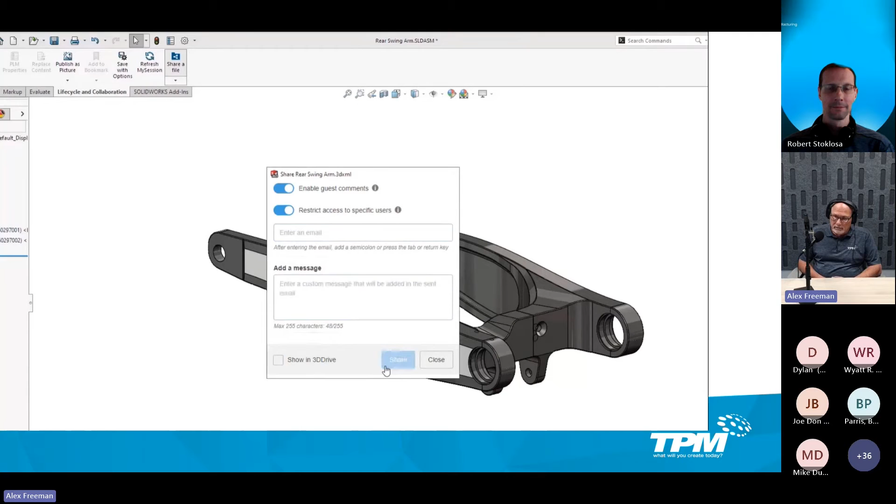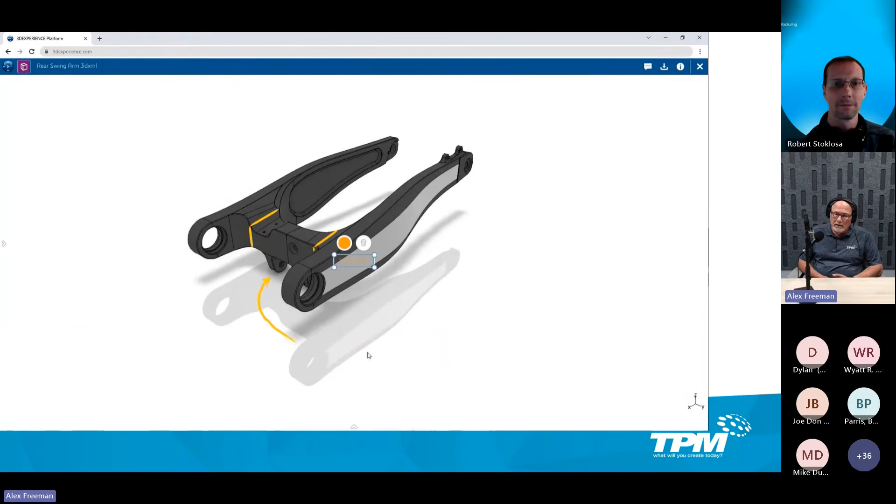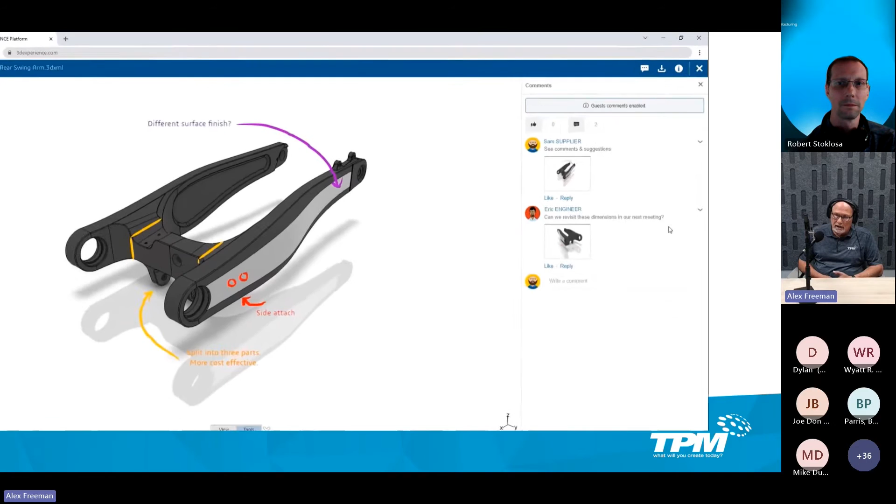Let's take a further look at share and markup and see what you think. This was a challenge for me in my years in industry. Directly from SolidWorks, you can share a file for review and markup, and you can add users, either external or internal to your company. You can add a message and send that through email to anyone who needs access. They'll get an email with a link, and they'll be taken to the 3D Experience platform, where they have many markup tools available to share ideas without the back and forth through email.

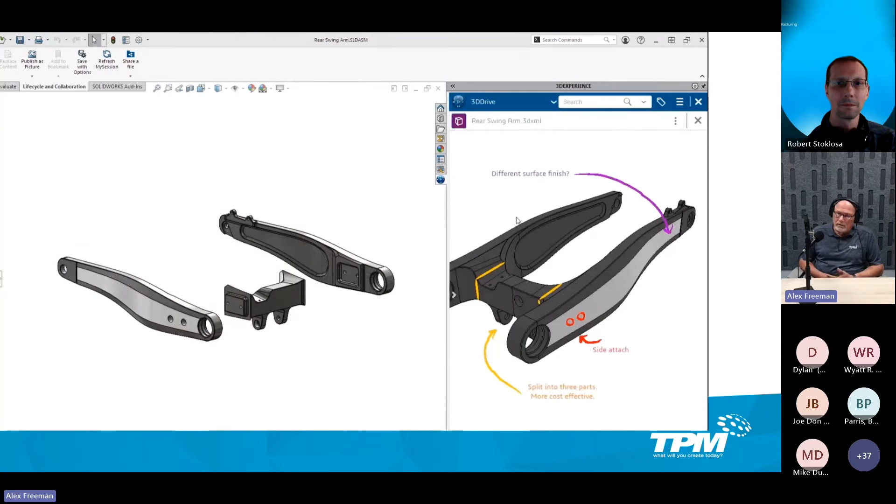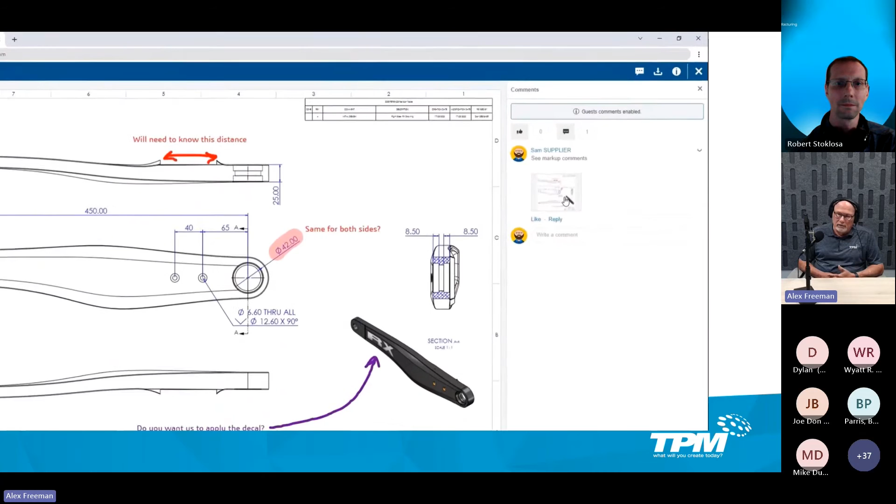Similar to forums, there's a way to see the complete history of the dialogue you've had about the design. This is completely stored in the 3D Experience platform, and you get notifications—you no longer have to worry about just receiving an email. You can go right in and see it directly, communicating with your collaborators. For drawings, you can share a PDF file or other types of files so people can see the drawings themselves and annotate those in the same fashion.

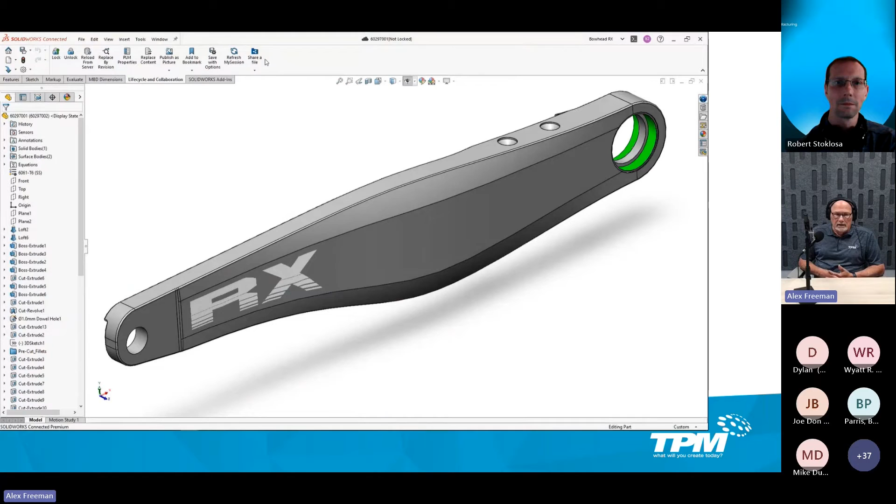You can also share a SolidWorks file export, whether it's STEP or STL, used for machining or additive manufacturing. If desired, the SolidWorks part file itself can be shared for further possibilities when collaborating on a design. You can revoke access to the design as well, if needed, to make sure your intellectual property is not shared with others.

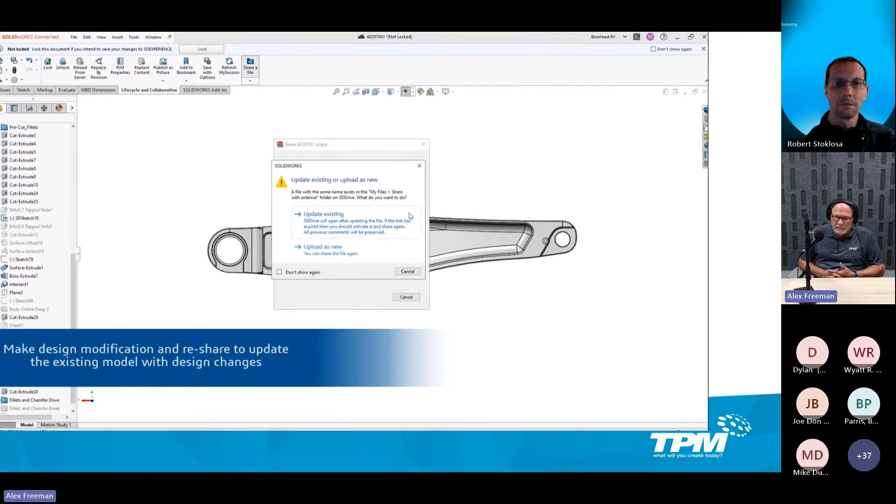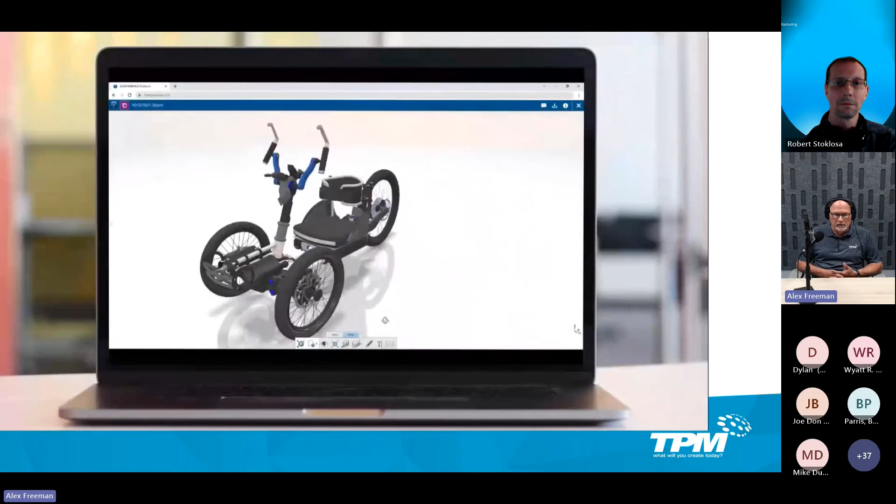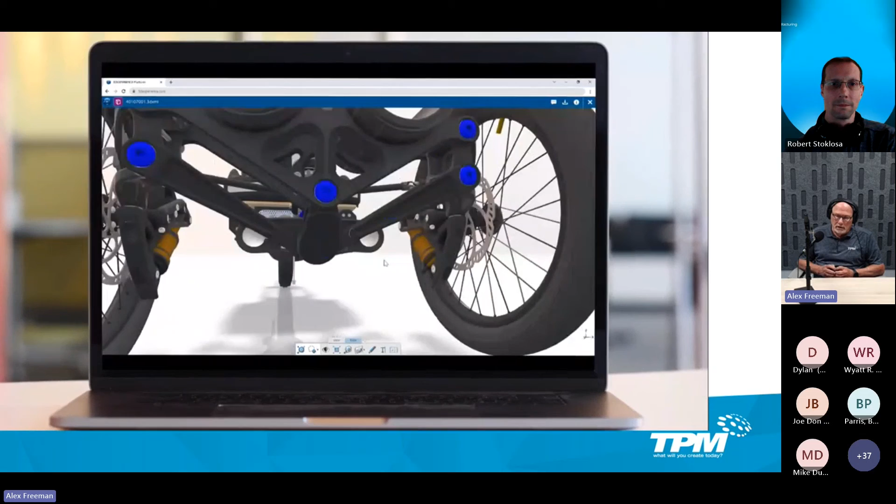You can update an existing design once you've made changes, or upload it as new. You also have the capability of having lightweight versions of large designs available for people to review on low-powered or even non-Windows devices like tablets and phones. So that's share and markup, a fantastic way for you to collaborate not only internally but externally with your users.

So Rob, what else do we have on the cloud data management side? Well, the cloud platform is quite extensive, everyone, so there's a challenge in presenting this level of complexity. We've broken it up into share and markup, which you're now aware of, and the next level up, which we'd refer to as store and revise. It's more analogous to the PDM solutions we have today, where we're just getting our data onto the platform. We have some approval processes in place. It's excellent for small to medium engineering departments, or those collaborating worldwide or across the country, and it ties into that basic PDM functionality.

If you're familiar with that, this is the level we'd want to have further discussions around. The next level up gets into more of a PLM feel, but it's very rich with functionality—things we really haven't had access to. Manage does some good tools for it, but this is cloud-based. It has full routing built in to get your data from one end to the other, including many different team members and departments. It's lifecycle management, a PLM tool, so we can pull in that level of intricacy into our workflow, with a fully built-in routing platform for engineering change control—something many of you have been missing at the PDM level, that rich engineering change control you've been looking for. So there are three levels to the cloud-based data management solutions, and we're trying to get everybody into share and markup right now.